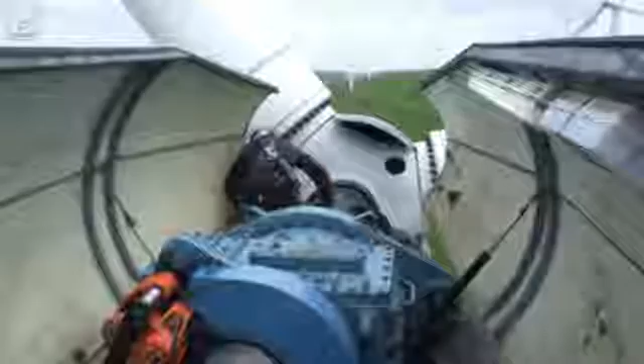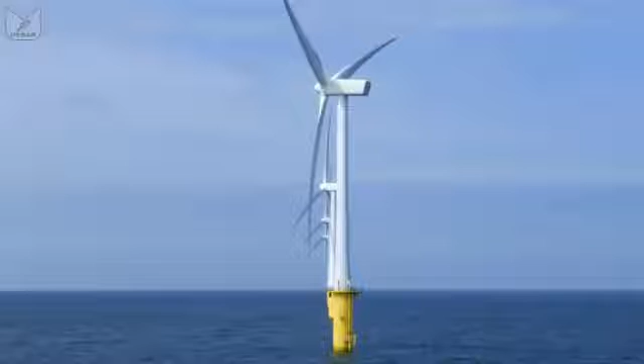And in this nacelle we have the generator, often a gearbox and occasionally a high voltage transformer, and the whole thing sits on top of a tower which is mostly there to keep the blades from digging a hole. We tend to class turbines by their power output, and hence their physical size. Wind farms might use many sub-megawatt turbines, each producing 400, 600 kilowatts, or a few multi-megawatt turbines, producing maybe up to 3 megawatts per unit.

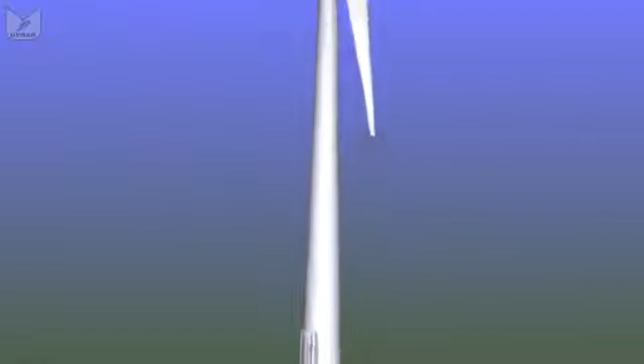Apart from physical scale, they are arranged a bit differently, so let's start by looking at a typical sub-megawatt model. Turbines of this type are typically 25 to 45 meters tall, and at the base you will often find 2 doors. The lower door takes you into a secured compartment where we have a high voltage step-up transformer. The generator at the top of the turbine is producing about 690 volts, and this transformer converts that into several thousand volts to send it more efficiently to the substation.

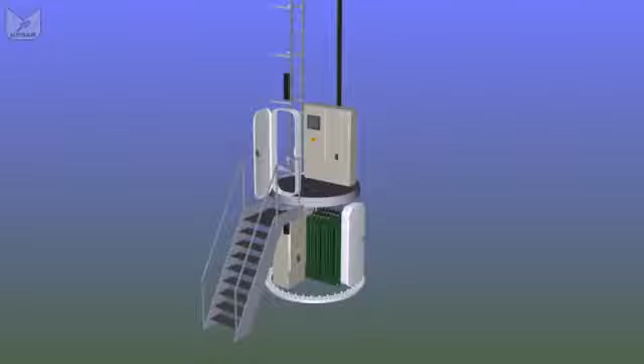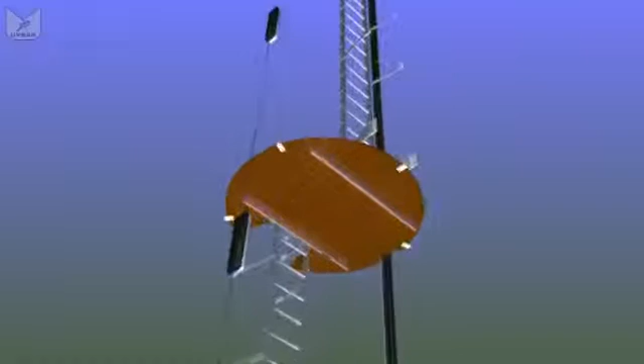The main entrance to the turbine is at first floor level, and there we find the control cabinet and the base of a ladder, or a series of ladders. Often in these smaller turbines, the ladders run to a series of platforms and they change sides at each platform to give you a rest area and a bit of fall protection. Platforms are generally just wooden discs suspended inside the tower walls, and they might have a trapdoor or a set of guardrails and a gate depending on how the ladders are arranged.

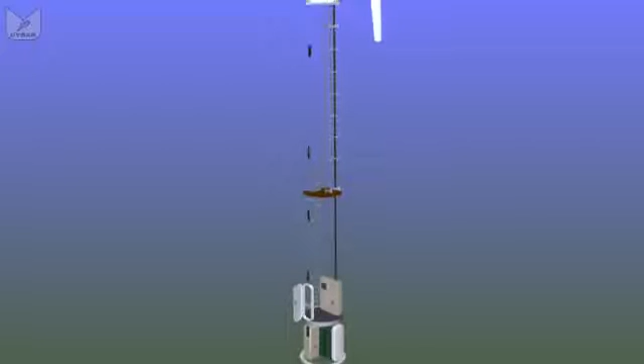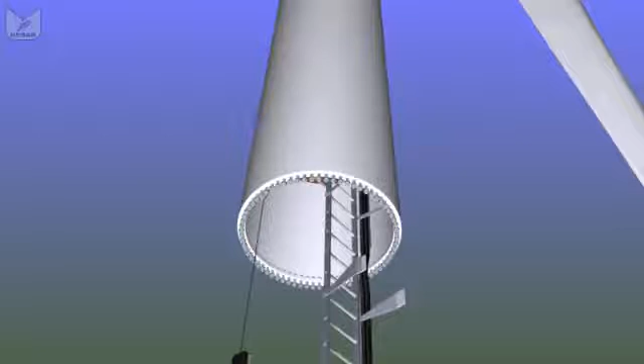The main run of cables goes up the wall of the tower, dodging past any intermediate junctions, because obviously the towers can't be delivered in a single 40-meter long section. They come in 20-meter long sections. They're bolted together with a lot of nuts and bolts. But as we move higher and higher through the platforms, they're getting slowly narrower and narrower, so the ladders are getting a little bit closer together.

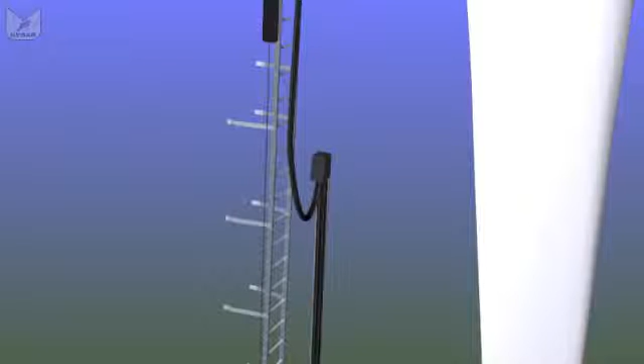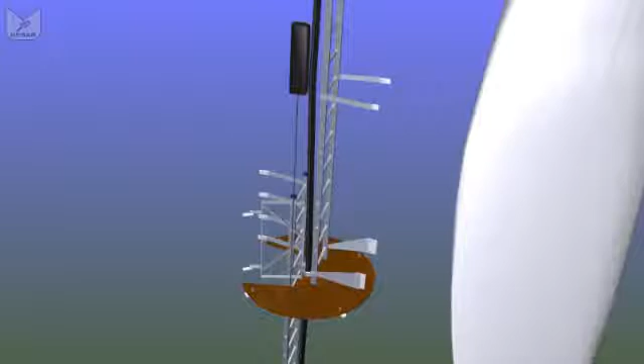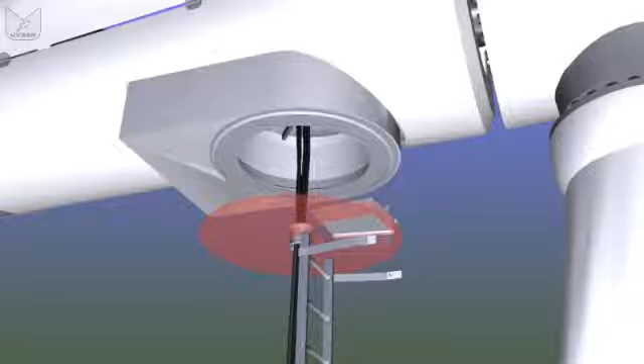But eventually the main cables stop being attached to the wall and they hang freely in the center of the tower, so they can twist as the nacelle rotates to face the wind. If they twist too many times, the nacelle will spin itself around to remove the twists. As we move up, now the cable goes through a hole in the center of each platform, and at the top of the tower we have a steel platform with a sealed trapdoor, which we call the yaw platform. Just above that we have the yaw ring with the bearings that allow the nacelle and the rotors to rotate around to face the wind.

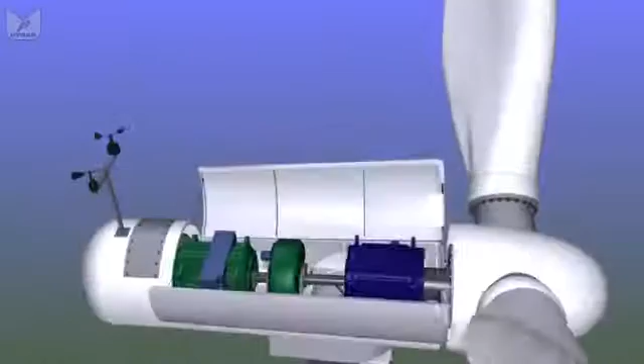And this sealed platform acts as a bit of fire protection, and also avoids people falling back down the tower, because at the top we simply have a hole through which we climb into the nacelle. And the nacelle in this case is a vaguely tapered tube. At the back we have the wind sensors, which give us speed and direction and allow the turbine to face into the wind and to change the angle of the blades. The nacelle itself is just a fiberglass tube.

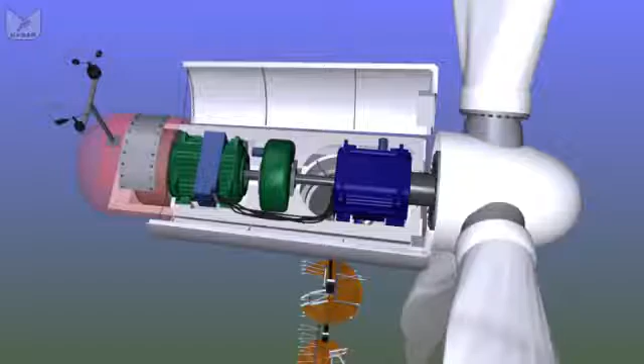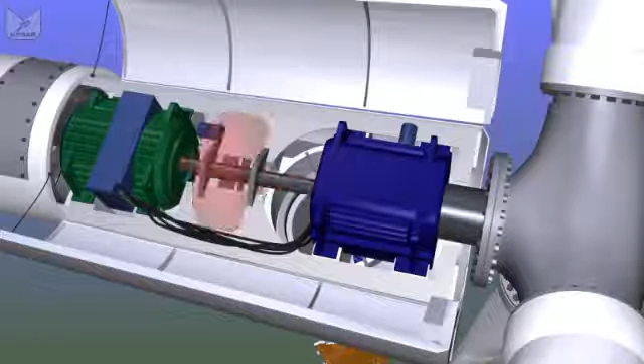At the front we have a similar fiberglass cowl protecting the hub, which is a steel casting on which we have bolted our 3 blades, and the blades can turn or pitch so that the angle they form with the wind can be varied. Out of the back of the hub we have a shaft which leads into the gearbox, then a high-speed shaft through a brake into a generator, and that generator then supplies the electrical power, as I say, at about 690 volts all the way back down the tower to the base.

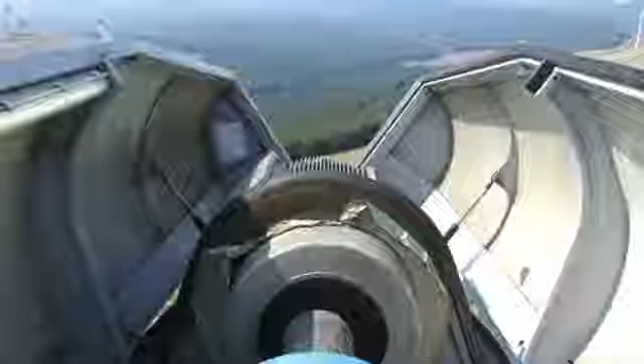And right at the back we have a cooling fan, as we're generating 500,000 watts of energy inside the nacelle. Some of that is wasted as heat, and without an efficient cooling system there is the potential for the turbine to catch fire. Now, the layout of a larger turbine is broadly similar, but some of the components are in different places, so let's start by looking at the tower section of a typical 2 megawatt turbine.

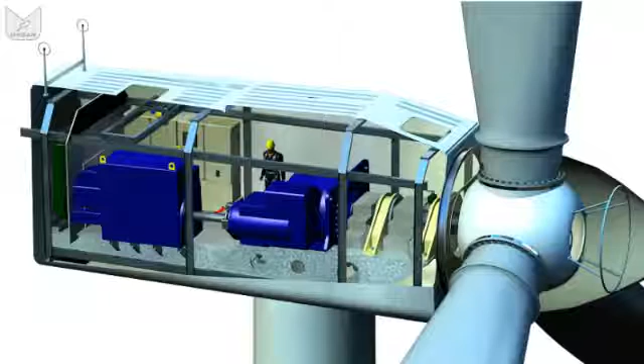Where we place the high voltage transformers in multi-megawatt turbines is a lot more variable. Quite frankly, we have a lot more room, so they can be in the nacelle, they can be at the base of the tower, they can be on platform 1 in the basement, they can be outside in a hut. In this example, the transformer's at the top, so when we go into our door, the one thing we'll not find is a transformer.

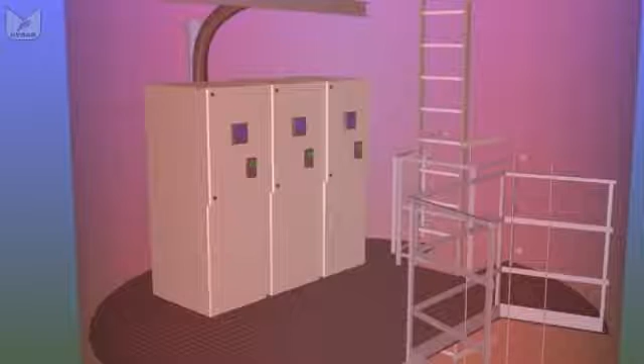We do have the high voltage switches, in this case on platform 2, but on the entrance platform we have the usual control cabinet and a lift, a little green box. And that lift will take 2 people to the top of the tower, or nearly to the top, without them having to climb the single, very, very long ladder.

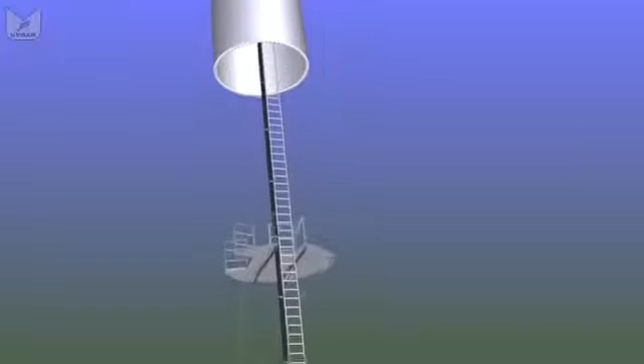Almost all large turbines will just have a single run of ladder for the majority of the run up the tower. It will have a wire or a rail system, a fall arrest device fitted to it, but it is still a long slog up the ladder, which is one of the reasons why service lifts are so important.

And again, the tower's in sections so that it can be delivered around the country without demolishing villages. Sometimes, if we're running a long distance and we haven't got room for a proper platform, we can put a half moon in place. No fall protection on the platform, but we assume you would keep your lanyards connected at this point because it's quite a long way down.

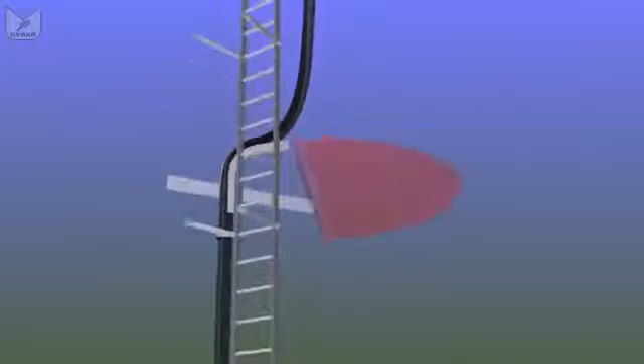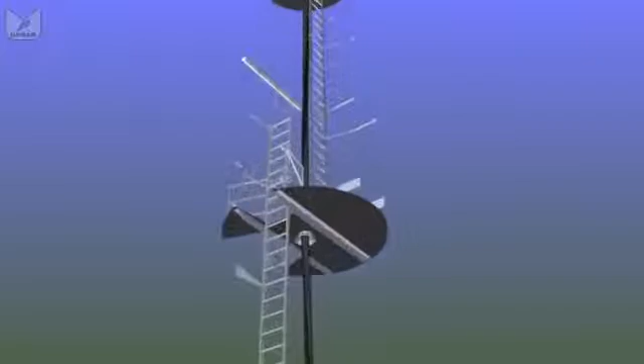The cable again breaks free from its mounting and hangs in the centre of the tower for the last 10-20 metres or so that it can rotate as the nacelle yaws into the wind, and the lift eventually runs out of space. Remember, the tower is getting narrower and narrower as we get to the top, so the lift tends to park itself about half a platform from the top, and we have a normal ladder which then leads to the yaw platform, and then it starts looking very much like the smaller turbine did.

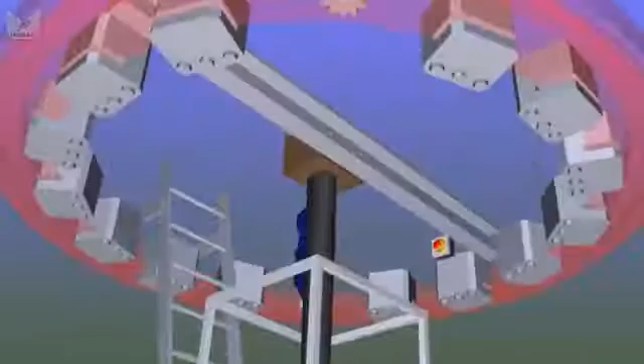We have a yaw ring bolted to the underside of the nacelle, joining it to the top of the tower. A series of disc brakes run around that yaw ring to lock it in position when the wind isn't changing direction, and when it is, we have a series of either electric or hydraulic motors that rotate the entire mechanism around on the top of the tower.

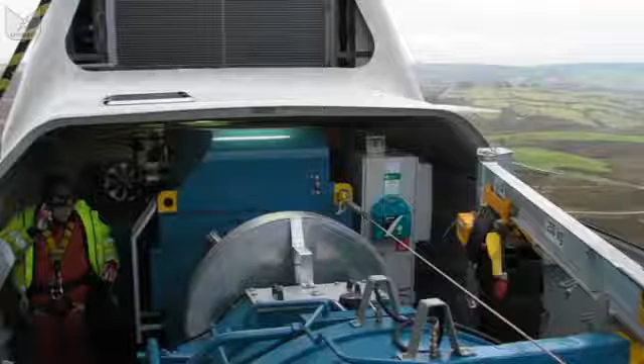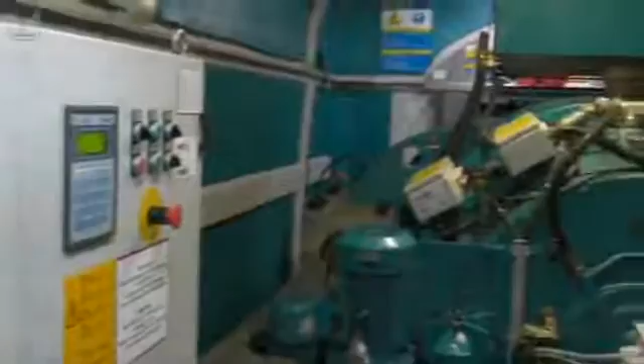The layout of a multi-megawatt nacelle is again more variable than for a smaller version. We always have to have a generator, but we may not have to have a transformer. In a few cases, such as the famous Enercon egg-shaped nacelle, we don't even need a gearbox. They're direct drive. We just have a shaft linking to a generator, and then lots of extremely complicated electronics to condition that power for connection to the grid. But in most cases, we need the same as we needed in the small turbine. Gearbox, generator, possibly a transformer, all in a fiberglass box.

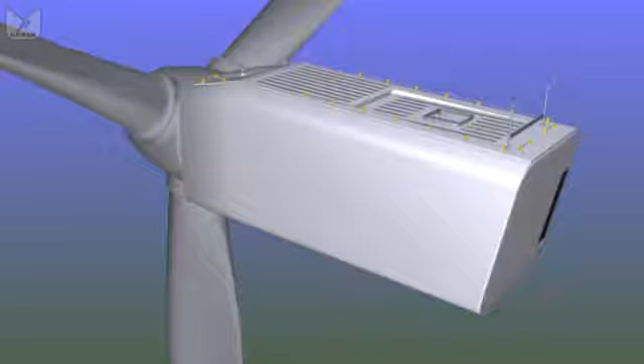And in our example, we're looking at a typical design used by a number of manufacturers where we have a nacelle that's 3 metres high, 2.5 metres wide, 7 or 8 metres long. It's a fiberglass box about the size of a site hut. As before, we have our wind sensors on the roof as far away as possible from the dirty air cast off by the blades as they spin round.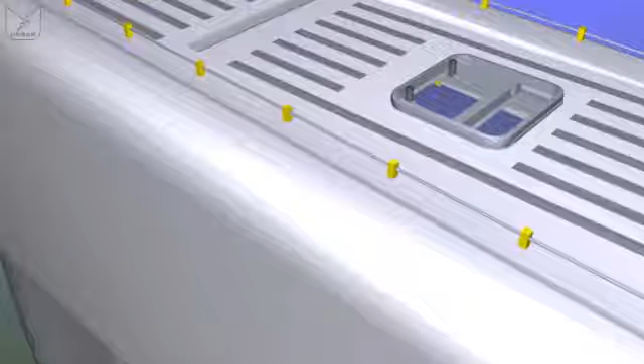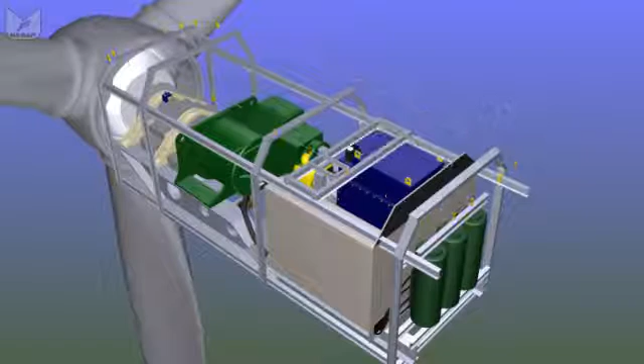This design is just a fiberglass box with a flat roof. We access the roof through a couple of skylights. Some designs are like before, big cylinder with 2 opening doors. Some have an entire roof section which opens, rather like an old camper van. If we take the skin off the box, inside we have the same kind of components we had before. They're just bigger, and there's a little bit more room, so they're laid out a bit differently.

The only additional component up here is those 3 green cylinders at the back. That's our high voltage transformer, which used to be at the base of the tower. Now, we've removed a lot of the control systems and the hydraulic systems that would just clutter up the pretty picture. We've added in a bloke for scale, but most of the big components are still here.

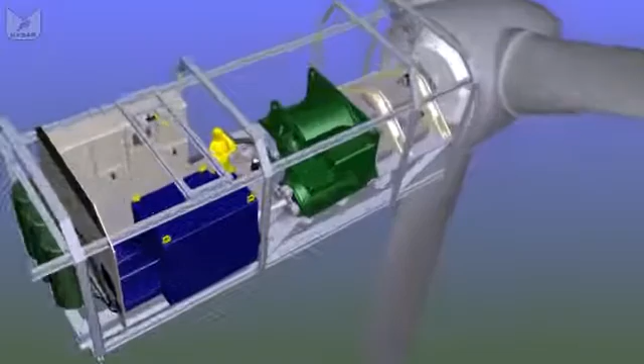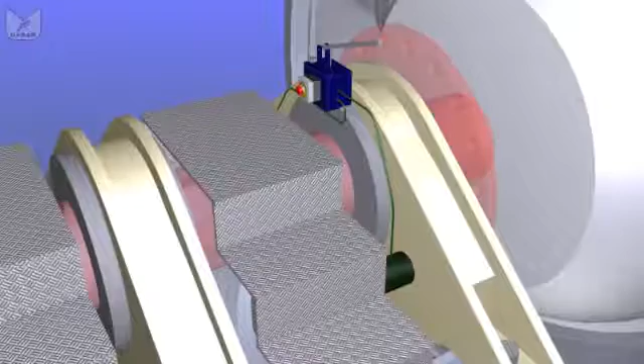If we look at the very front of the nacelle, we have a couple of bearings which support the main shaft, which is a hollow tube, 50, 60, 70 centimetres in diameter. It's hollow so that we can get electrical cables in through this main shaft into the hub to drive all the control systems inside the hub. And we have a couple of pins on the first bearing that lock the main rotor in position if we need to access the hub. It's a safety feature. If you're in there and it starts rotating, it gets scary.

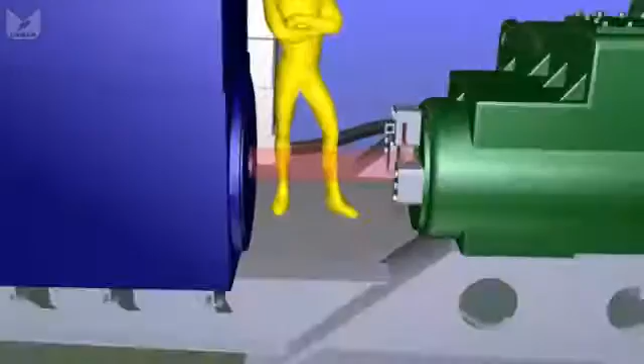So our main shaft drives our gearbox, which is mounted centrally because it's often the heaviest component. Out of the back comes a high-speed shaft, as before. That's where the braking system is. The high-speed shaft then drives the generator, which is usually oil-filled. The generator then supplies 690 volts, in this case into our transformer, which is sitting right next to it. That high-voltage signal then passes through the switchgear and the cabinets, down the dropper cable, straight down to the bottom of the tower, through those switches on platform 2 and off to the substation.

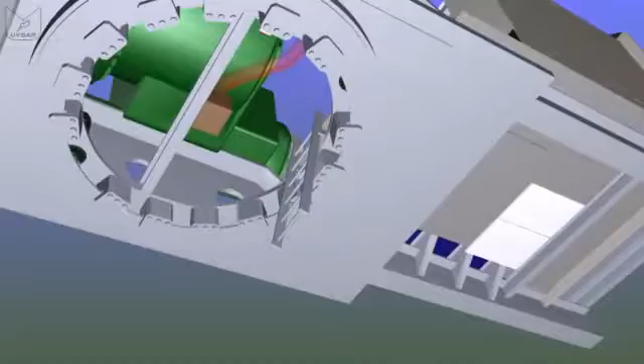And that, as an overview, is pretty much all there is to it. The only thing left to talk about are the blades, obviously, which actually do the work. We still have 3 of them. They still pitch, in other words, they twist on themselves to line up with the wind.

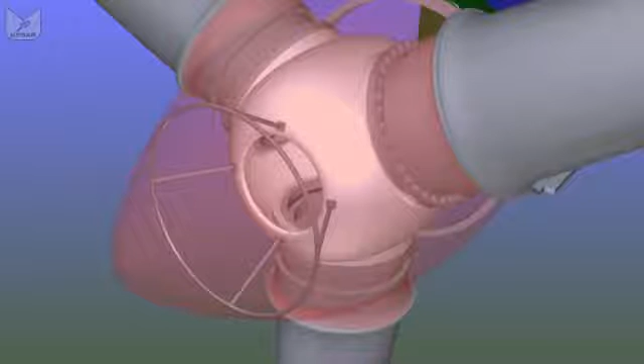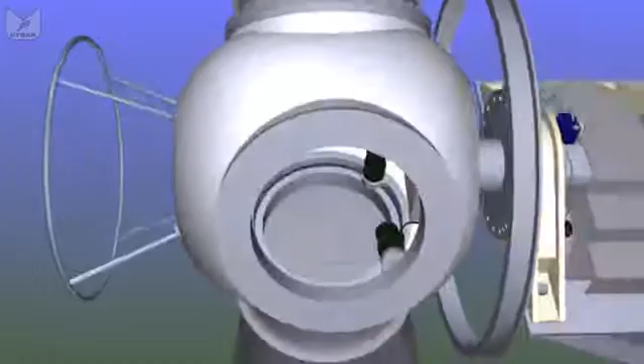And you access the hub through the gap between this fiberglass cowl and the cast hub. It's a bit of a wriggle, but you wriggle through, usually feet first, crawl through the hole in the middle of the hub, and inside the hub we'll find the control electronics, the pumps, the motors and the batteries to control the pitch of each blade, rotating it on its own bearing to set the optimum angle for the wind. If we turn the blades through 90 degrees so they're edge on to the wind, there's no net turning force. It's a process called feathering, and the turbine will stop.

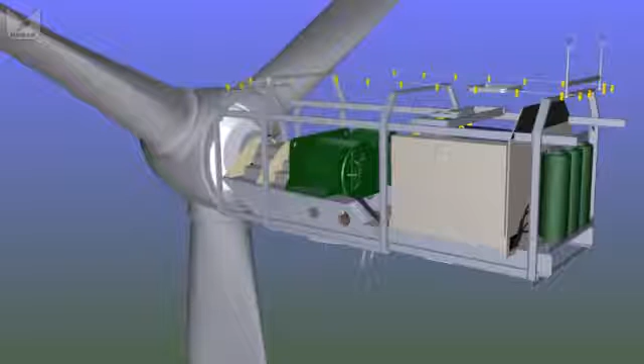Obviously there is a vast amount more going on inside a turbine, lots of wiring and control systems and lights and sensors and fire extinguishers, etc. But that is basically it, the general overview of most turbines that you find on wind farms today. Designs for the future will be significantly different, but at the moment it's a windmill on a stick.